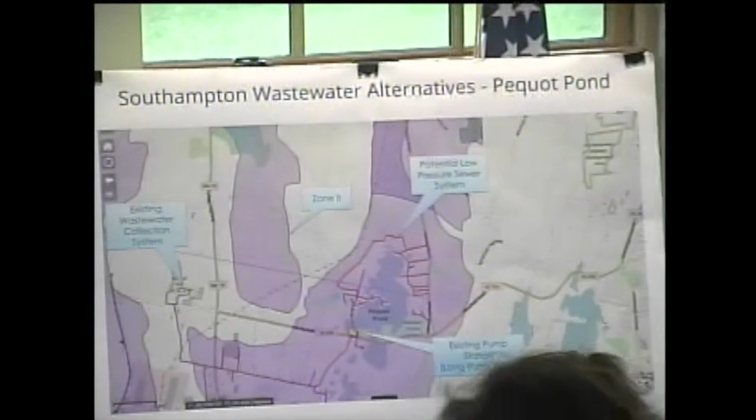As Mary said, my name is Kurt Mailman, and I am a dirty water guy. I've been in wastewater for the last 30 years, believe it or not. And so I've got a lot of experience working with small communities like yours. If you're familiar with the New England Water Environment Association, I'm the chair of the Small Communities Committee, and our role as a committee is to help small communities that have less than 1 million gallons a day of wastewater flow. So we do a lot with small communities, a lot with small flows.

And what we thought we could do today is talk a little bit about your situation here in Southampton and maybe give you some ideas and things to follow up on and carry on the discussion and the dialogue and further it to help you with your wastewater needs. Okay, so bringing you back probably almost 2 years now, we came with a similar set of drawings. Charlie over here probably remembers that discussion.

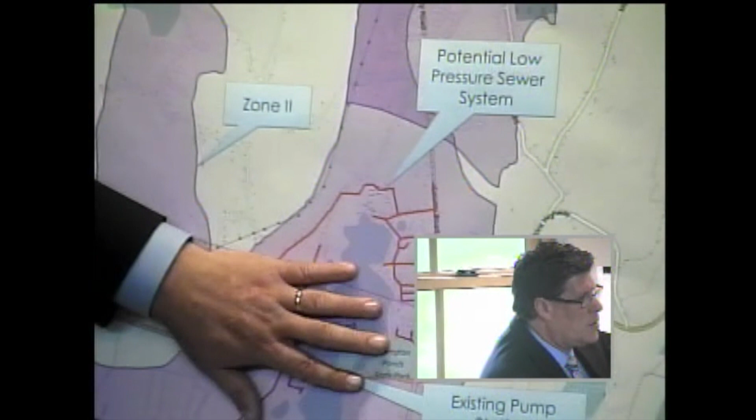And there are really two primary areas of concern, although there might be others that you might identify for wastewater dispersal needs. And so this drawing shows you the Pequot Pond area, which is half sewered into Westfield. I'm sure you've seen similar before. The purple areas here are Zone 2 aquifer protection areas, and the red is the existing infrastructure, including a pump station on Long Pond Road. And that pump station was actually sized to accommodate flow from Southampton when it was designed. So there's a piece of infrastructure that's already in place along the Pequot Pond.

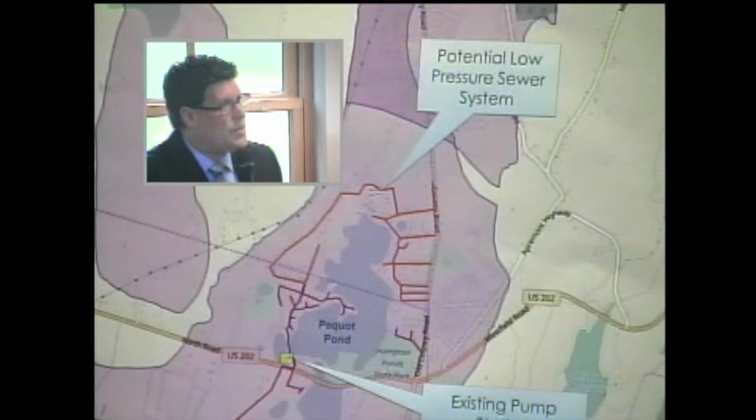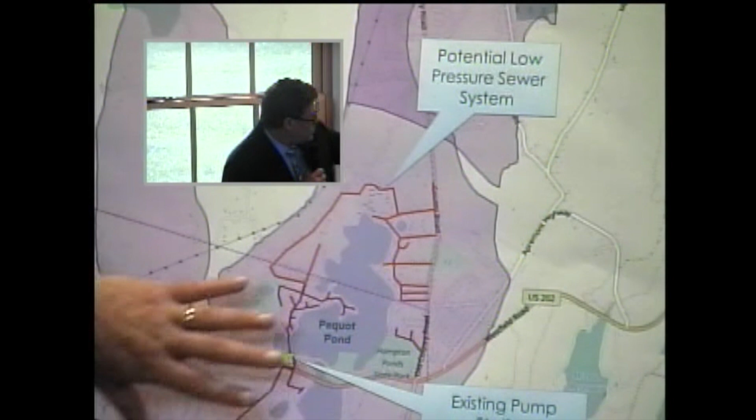So what are the things of concern associated with that area? Well, it's very densely populated. There are about, I want to say, 400 properties there. And the soils actually are pretty decent. They're well-draining soils. Unfortunately, they're draining nutrients into the Pequot Pond. So there are issues with water quality as a result. And so that's the primary reason why the lower section of Pequot Pond was sewered in Westfield many years ago. So people may not notice that there's a wastewater issue because the effluent is actually traveling quickly through the soils, so it's very rapid.

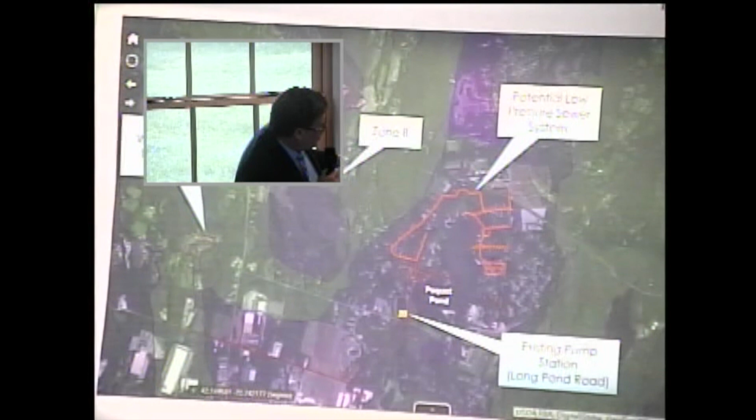This second drawing here just shows, again, to orient you, here's where the pump station exists, and there's a little bit of collection system over here as well.

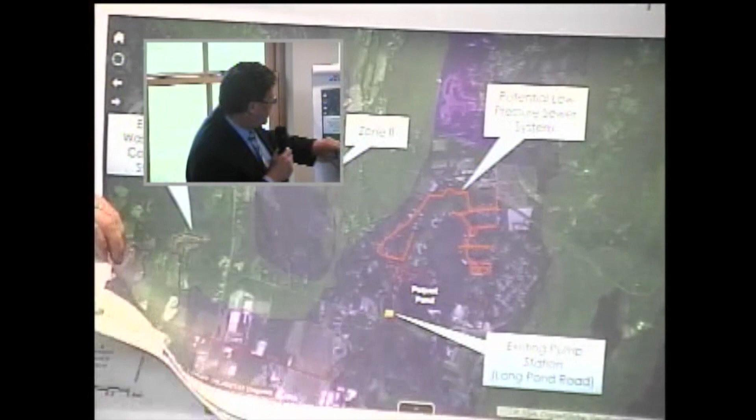How many of those 400 or so homes are actually hooked up to the Westfield sewer system there? There are 400 in Southampton. Oh, so 400 are all on sewer, okay. Oh, those aren't on sewer, those are the ones that should be. Correct. Right, there aren't any on the northern side.

Before I go on, now I'm confused. Are there Southampton homes hooked up to the Westfield? No. None. Okay. All the infrastructure ends at the line. I should have showed you where the line was. So 400 homes in Southampton that are not connected, that are presumably polluting, really?

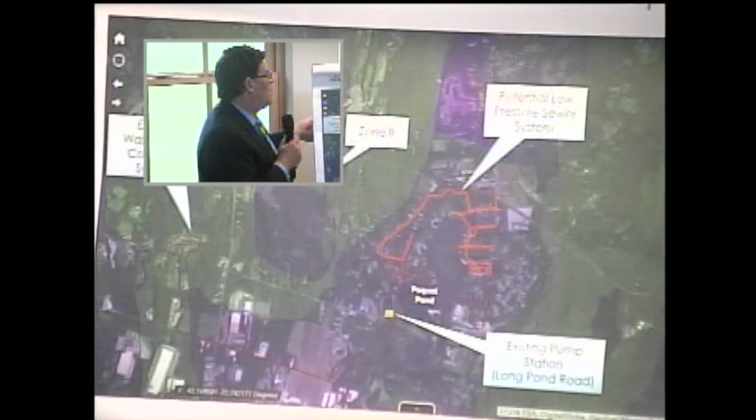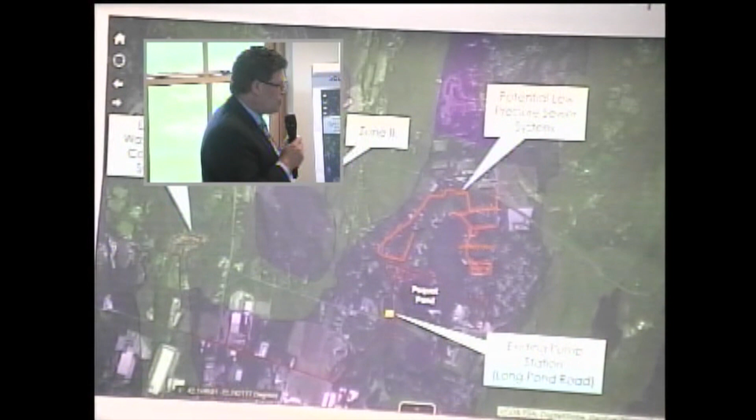There have been studies that have indicated that there's nutrient issues there, going back to, I believe, 1987. So that's not a new issue, but historically there hasn't been action to work with that.

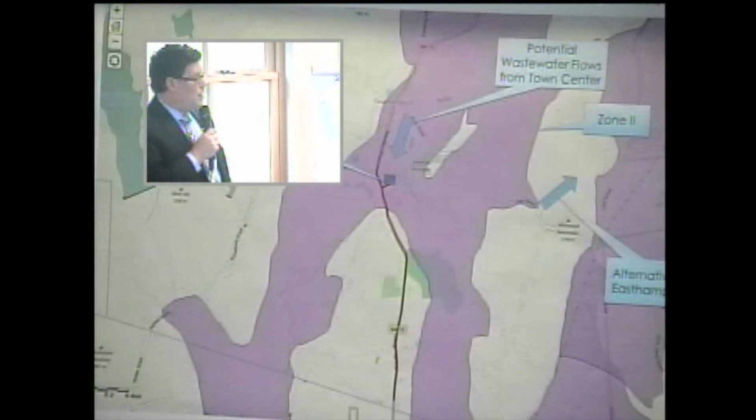So that existing pumping station is servicing Westfield? Yes. But previous studies showed that there was 50,000 gallons a day capacity built into that pump station to handle Southampton's flow if and when they ever wanted to tie in.

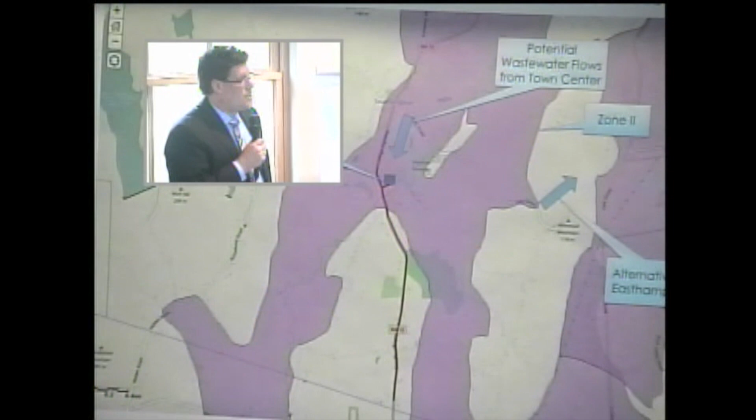Sorry, go ahead. Just for that area, though? Yes, that's right, just for the Pequot area. And that capacity is still there as far as you know? Yes. Okay. And what does that represent in terms of homes? That would theoretically handle the northern section of Pequot Pond.

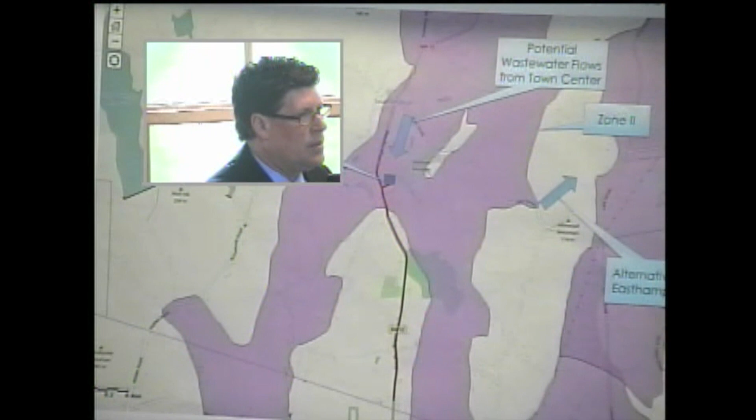Okay. I just wanna- Well, let them do the presentation, yeah.

So the other area that we spoke about a couple of years ago was the Route 10 corridor. So here's your line between Southampton and Westfield. And this area is currently not served by any public sewers. As I showed you before, there are some sewers in Westfield just over the line.

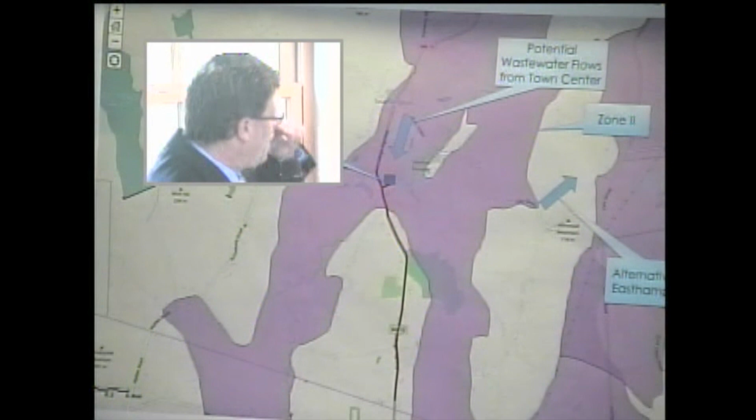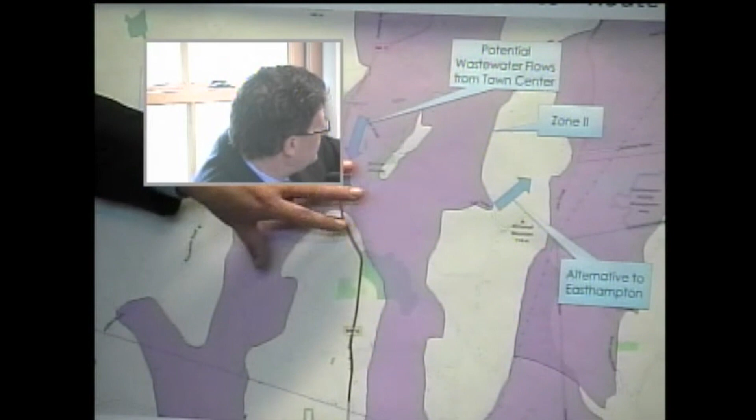There were some studies done previously that recommended sewering the entire town of Southampton by various means, some connections to Westfield by public sewer and some more decentralized community type sewers and systems. One of the recommended areas was a groundwater discharge just to the west of the Manhan Meadow. In a couple of minutes I'll talk about some newer technologies that make that more attractive and maybe more cost effective than previous recommended plans.

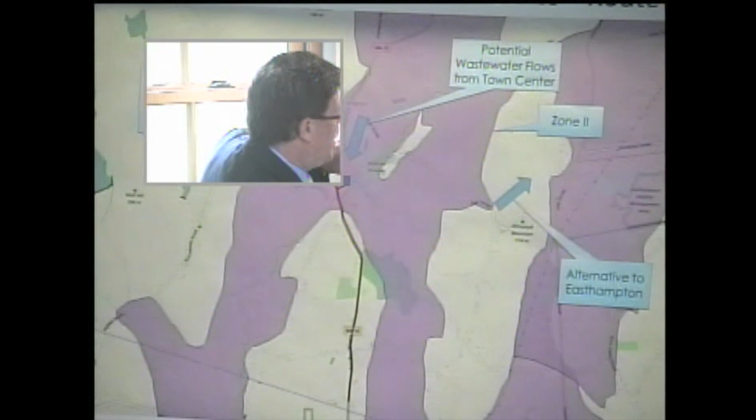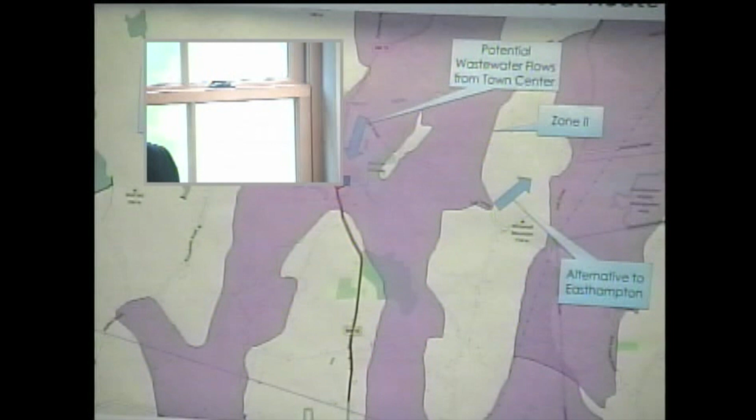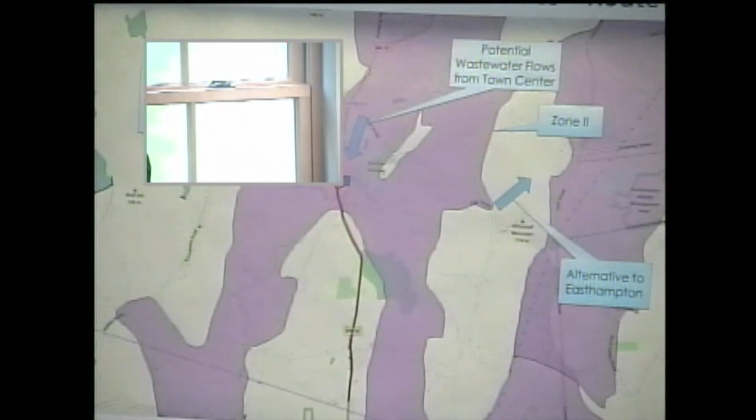There's also an opportunity potentially to route some of the areas with septic issues and decentralized wastewater issues to Easthampton. Back and forth through the years, there have been discussions to connect to Easthampton or not, depending on their capacity. So those are things you can also consider. Westfield presumably has enough capacity to handle wastewater at their treatment plant. Easthampton reportedly also has some capacity available.

I've worked with a number of communities to formulate intermunicipal agreements to make those a reality. It's important to craft those in such a way that it protects the community. I've got a lot of experience doing that.

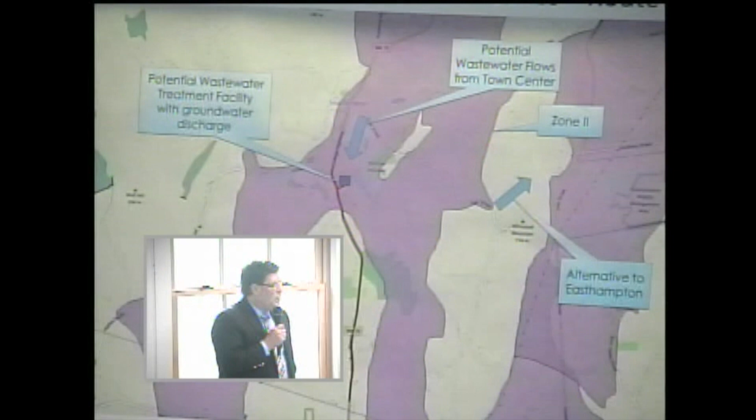So this Route 10 corridor here, the idea was generally to foster economic growth along that corridor rather than to abate pollution problems. You've got wide open spaces along this corridor, so in theory you should be able to find that 4 feet of separation to groundwater because you've got large parcels and you can pick and choose. So the focus from the Pequot area is more water quality. This is more of an economic development focus.

You could also process flows from the northern section of Route 10, either to Easthampton or to what we call a community system. This is just showing the directional arrows of where the wastewater theoretically would come from.

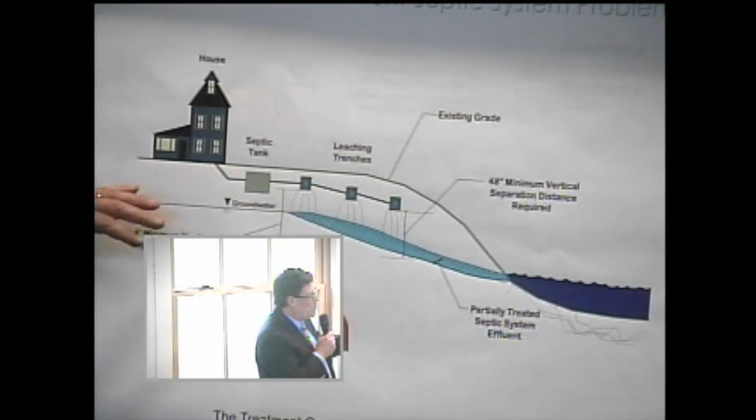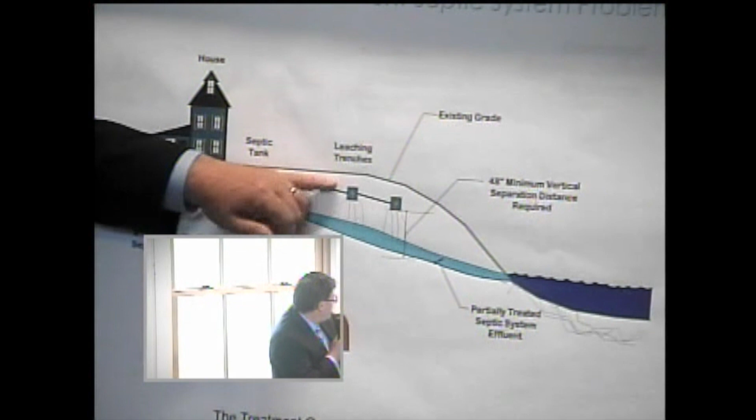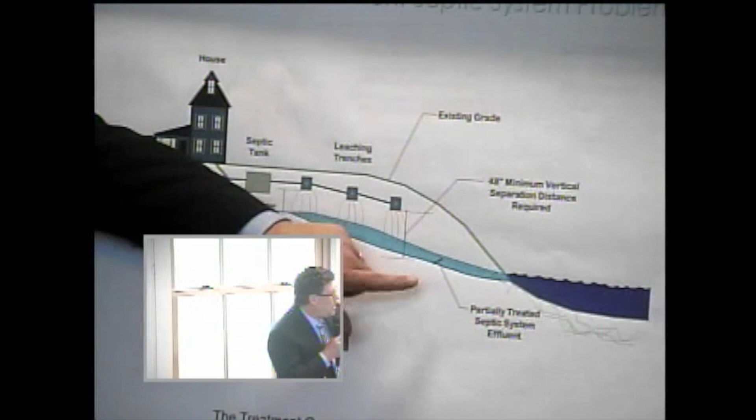This is a quick graphic that shows why there's a potential pollution problem by surface water areas like the Pequot Brook. You have to get that separation to groundwater, and in a lot of instances you can't have that unless you mound systems, but they're very expensive on a parcel by parcel basis. So there's a possibility that you hit the groundwater because the soils are so permeable, and the pollutants travel quickly out into the surface water bodies.

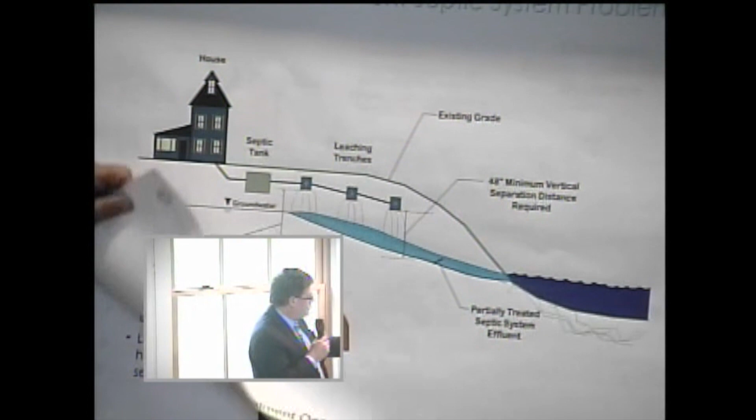So I've talked a little bit about concerns and issues and locations. I'm going to talk now a little bit about technologies to assist. And there are some newer technologies that are available that probably weren't when the original sewers were constructed in Westfield. And one of them is low pressure sewers.

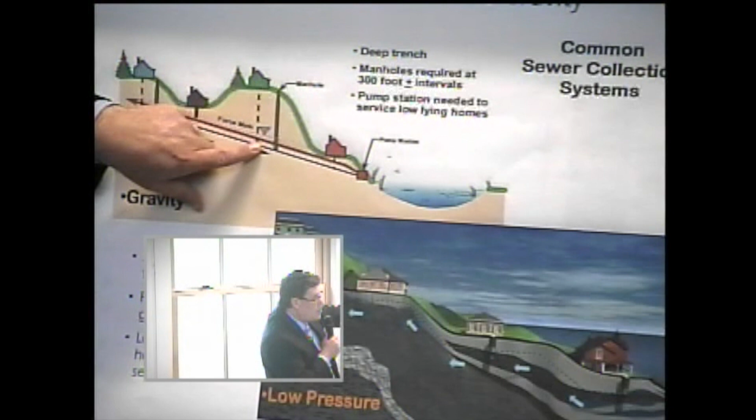And I'm not sure if anybody here is familiar with them, but essentially the old way of doing a sewer system, particularly with a lot of topographical change, would be to collect your pipes in your gravity sewer and have a series of pump stations to pump up over the hills. Okay, but what that does is it requires depth when you get to high points in the area. You have a deep excavation, which is very costly, particularly if you're in groundwater.

So the newer style is really to implement individual miniature, what they call grinder pumps on each property. And what that allows you to do is only dig 4.5 feet instead of dig as deep as you need to get connected by gravity. So there's a cost savings. On the other side of the ledger, each individual house has a small grinder pump sited to process their flows.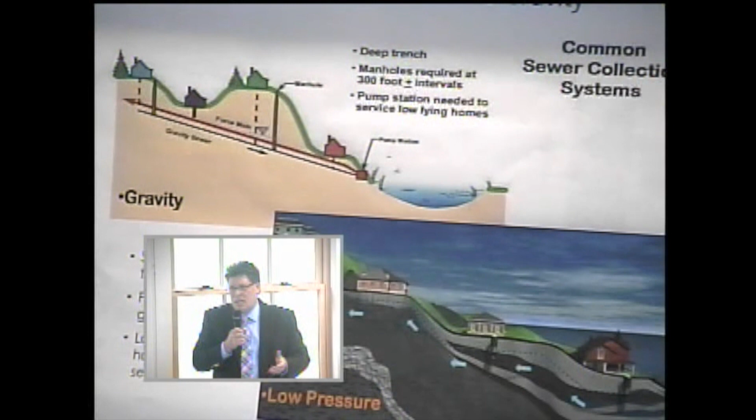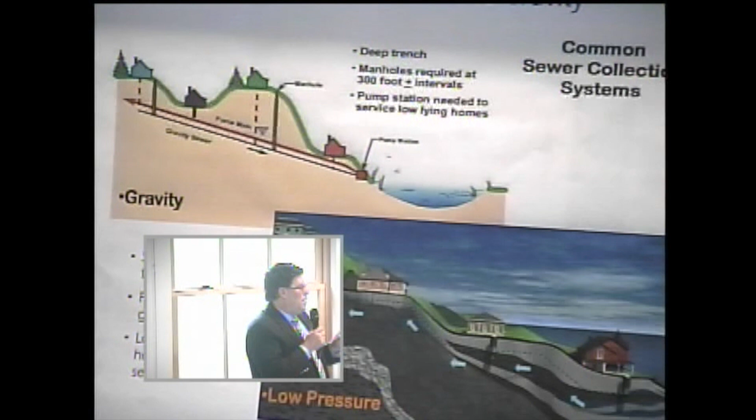So, people would ask questions about, well, what about power supply and redundancy, things like that. So these grinder pump systems are built with connectors so that you could put a portable generator out. You can essentially make them almost idiot-proof. So it's almost like a sump pump that grinds, then pushes it up?

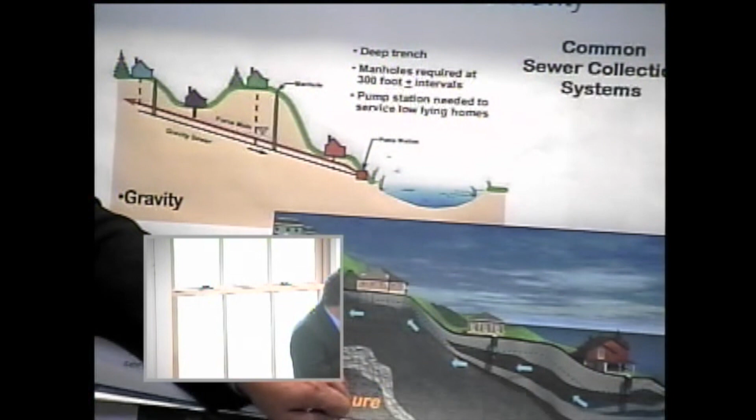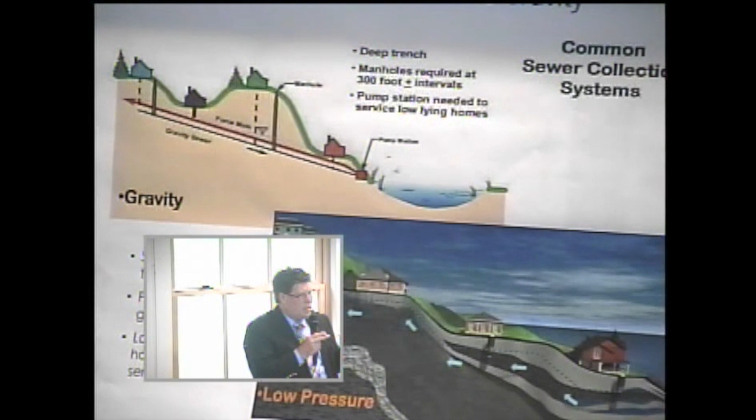Yes. Okay. Yes. And the systems are sized with telescoping sized pipes based on the number of pumps that are in the line. So the first 3 pumps would have a small size, and then the sizes would get larger as you went through the system. But the real benefit is if you're on bedrock, it reduces that, and it also helps you with water control during construction.

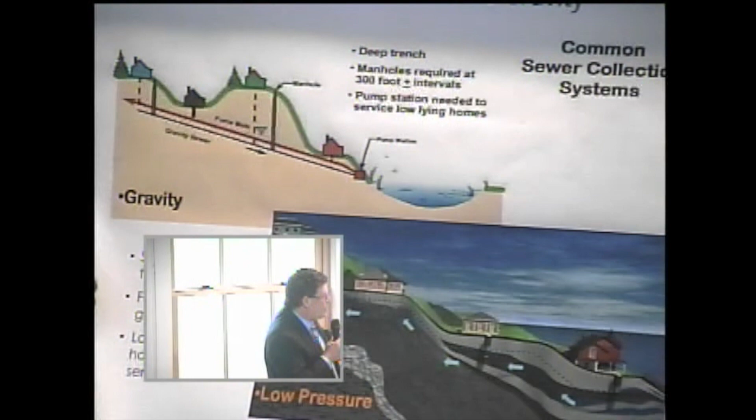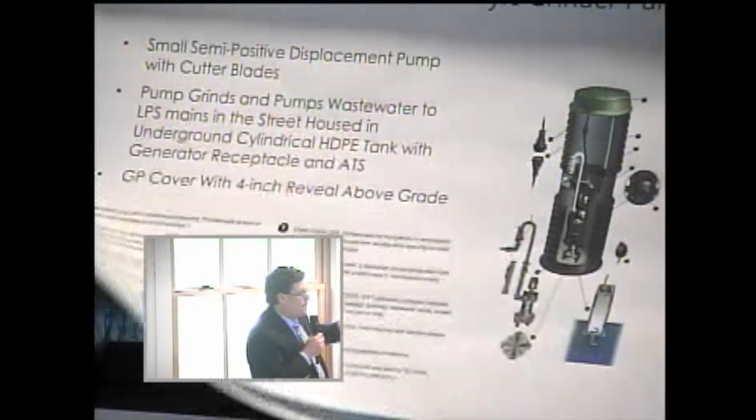Here's a cutaway of what that pump would look like. Okay, it's got a rotor and a stator and a grinder mechanism, and they're very reliable. Not only that, they don't use much electricity. It's like the equivalent of like a 40-watt light bulb. So when you flush a toilet or whatever, does that automatically put the pump on? Or is there a reservoir that it collects for a while, then it pumps it out?

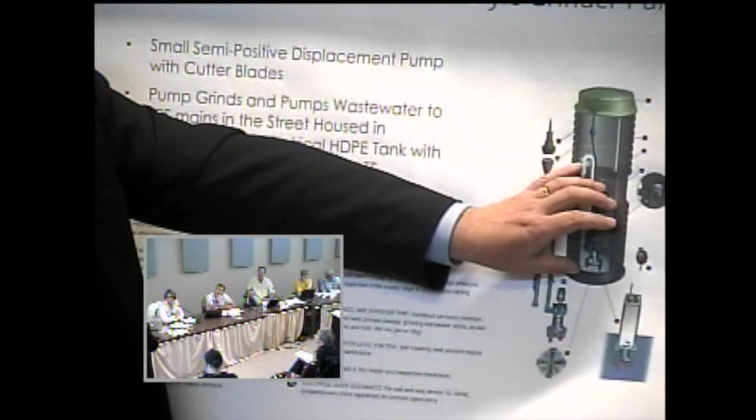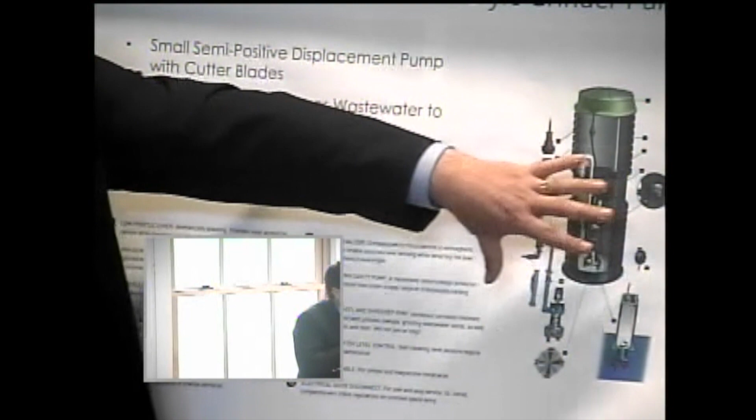Yeah, there's a small holding tank in each one of these. Usually it will range between 20 and 40 gallons. If you had a commercial building, they would sometimes double those up or make a wider base to it with a larger collection area so that you could store more wastewater before it pumps. So it saves energy and wear and tear? Yes. Yep.

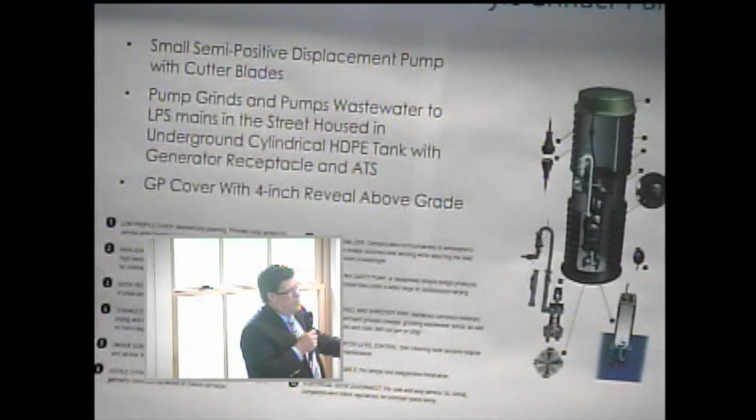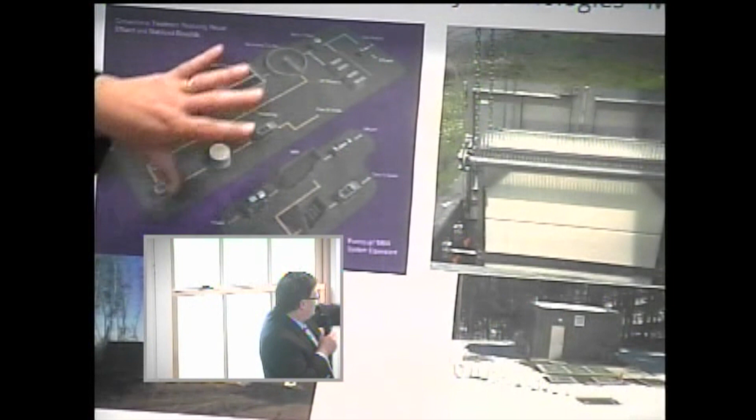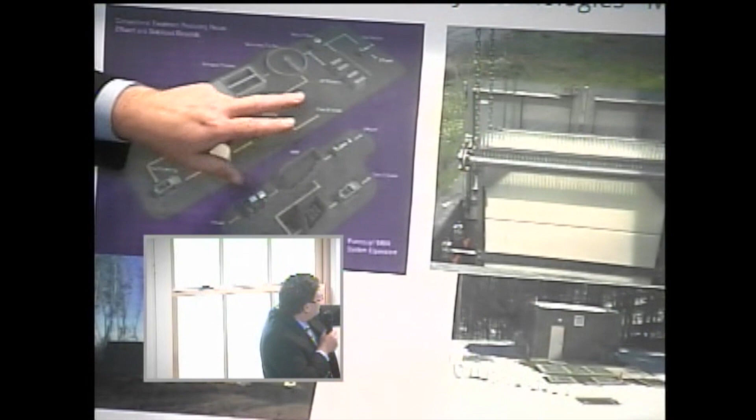So I wanted to talk a little bit about some of the technology available for community systems. Okay, so what I've got here is a thumbnail graphic of what the 1990s, early 2000s small treatment system would entail. So you've got some clarifiers, circular clarifiers, and you've got some aeration tanks, and you've got sludge, and it's a pretty large footprint. And generally the engineering design standards would allow you to have additional footprint to add additional tankage or clarifiers, things like that.

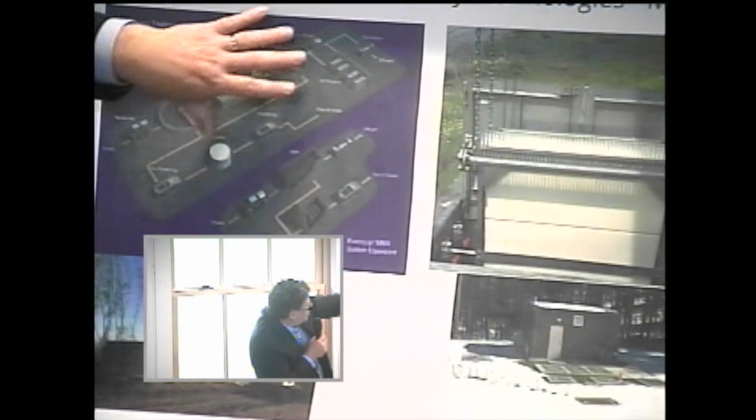So I was just showing this graphic to show you that the new systems, of which the membrane bioreactor, which I show over here on the right, they're much more compact. They actually essentially come on flatbed trucks, and they're modular. So you can stack them one after the other, taking up a smaller footprint and really allowing you to make the capital expenditure in parts or in pieces rather than a huge capital expenditure all at once.

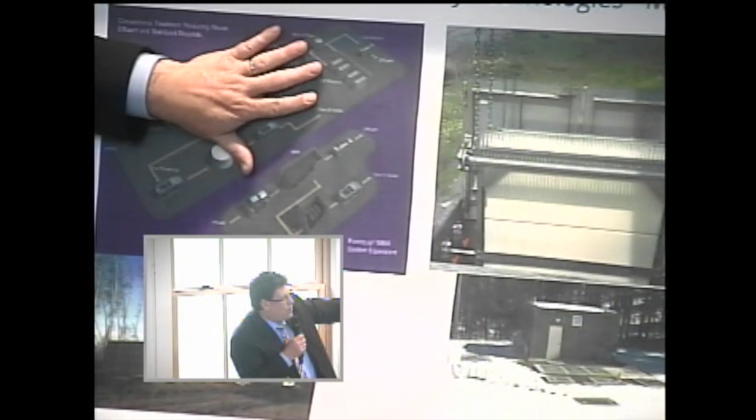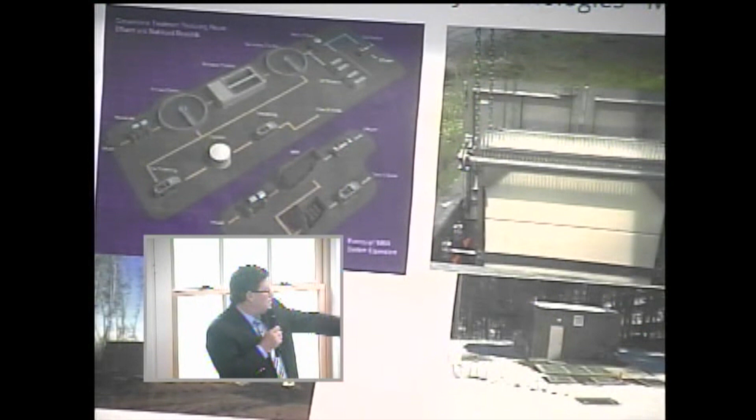Some communities under this style would overbuild their wastewater treatment plants. They wouldn't have enough flow. Then they wouldn't have enough microorganisms to process the wastewater, and it would cause upsets and poor treatability. These modular systems produce a very high quality effluent, almost drinkable effluent that you can disperse. Almost. Almost.

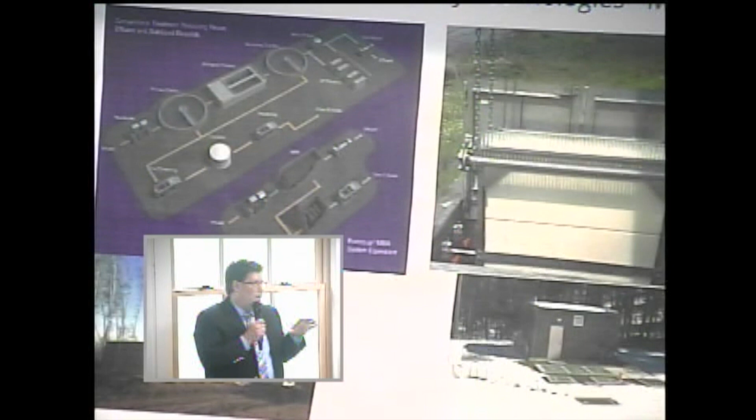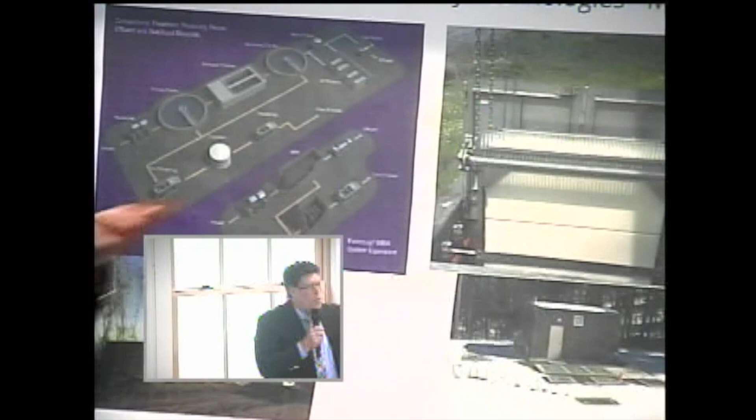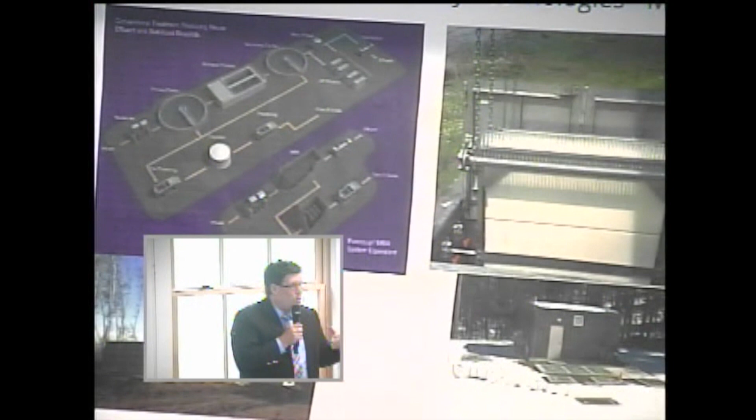The newest thing on the horizon, the real cutting edge view of these, particularly when you have a really high quality effluent, is to implement what they call smart sewers. And smart sewers actually act as a resource recovery tool where you would theoretically, if you had buyers, sell the water for irrigation and sell the sludge that comes out of the tanks annually or quarterly, and actually turn that into a revenue stream for the facility.

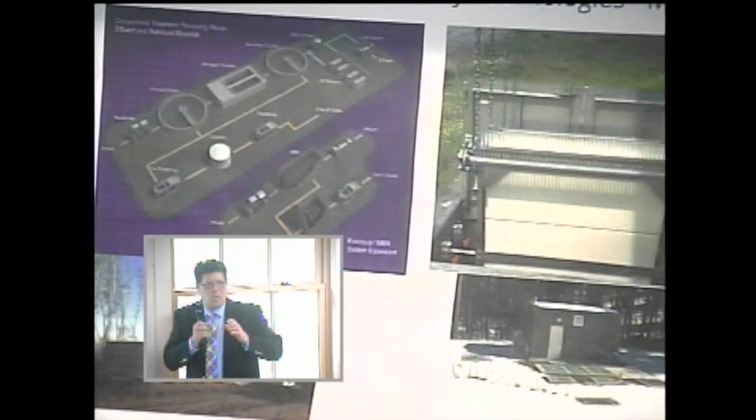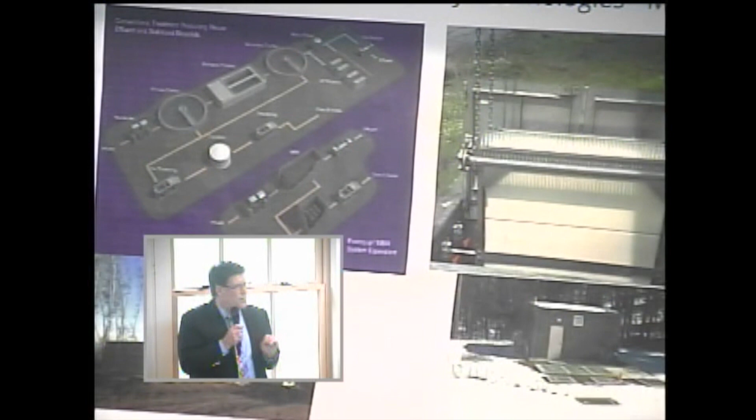So that's where we're heading as an industry, and probably in my lifetime we're going to see it expand. In the Northeast, it's a little less accepted right now because we tend to be a lot more conservative in the Northeast, but it's going to happen.

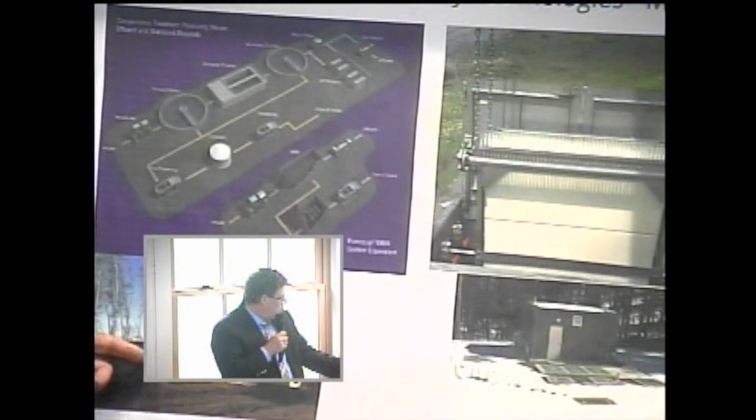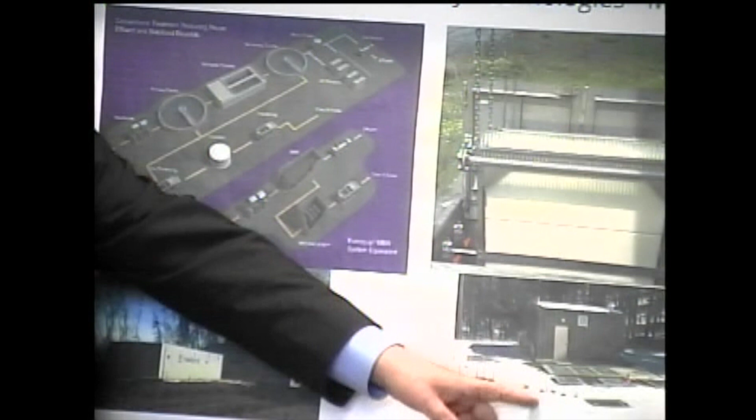So just a couple of pictures down below. You can see this is a treatment system. This is an MBR system. It looks pretty ugly, but it's just dropped off modular flatbed. And this is another system here. This one is in Littleton and processes 40,000 gallons a day. Pretty small footprint. That's the treatment piece. You still have to disperse it. You still need to get it in the ground. So you need some kind of system to disperse your effluent.

Here's another example. This is a different type. This is called an Amphidrome. Again, a lot of this is buried. All you would see is this small control building. You've got an anoxic tank for conversion of the nutrients. And you've got a bioreactor here, clear well reactor, and your pumps out to your dispersal system. So what it does is it intermittently, with blowers, adds oxygen and then takes it away. That's the way you nitrify and denitrify, which removes the nitrogen pollutant.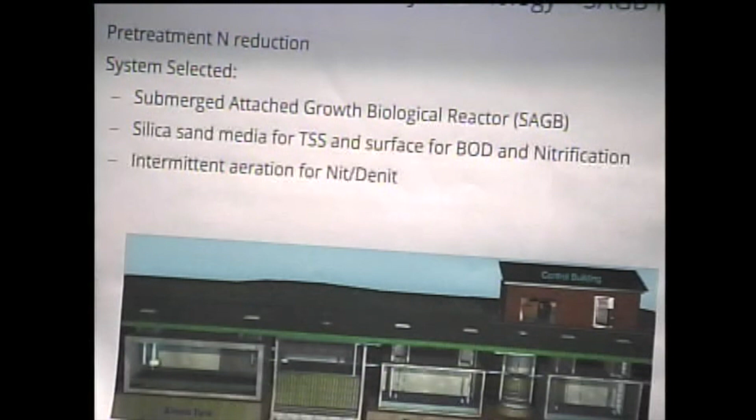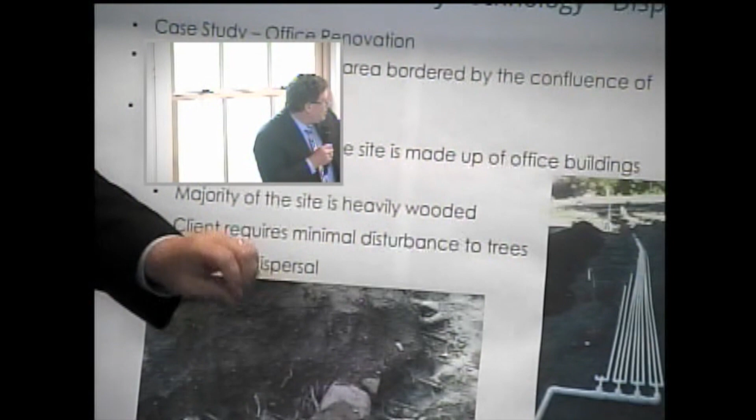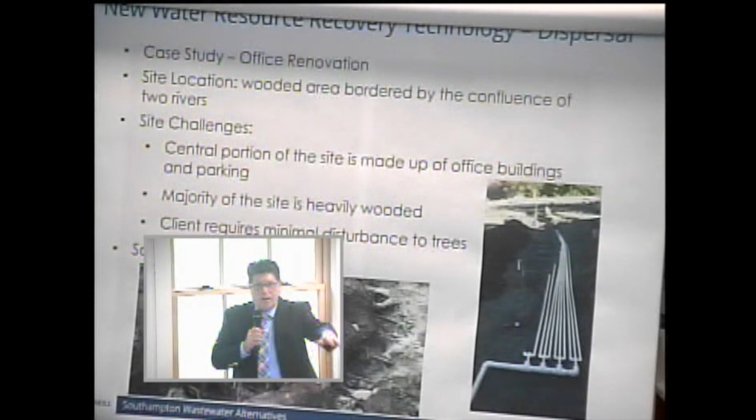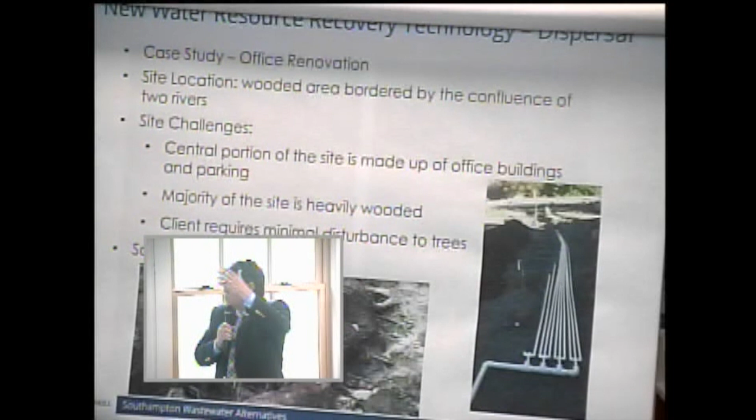So once you've got your clean effluent out of one of these systems, then you need to do the dispersal. And very new in the industry and becoming ever more accepted is drip dispersal. What drip dispersal does is it discharges through small 5/8 inch diameter tubes that have little perforations and emitters. For those of you who are familiar with farming, you actually use a little plow, and you don't have to dig a huge bed the size of this building anymore. You can plow these little tubes in, and each little emitter discharges a known amount of flow every pump cycle.

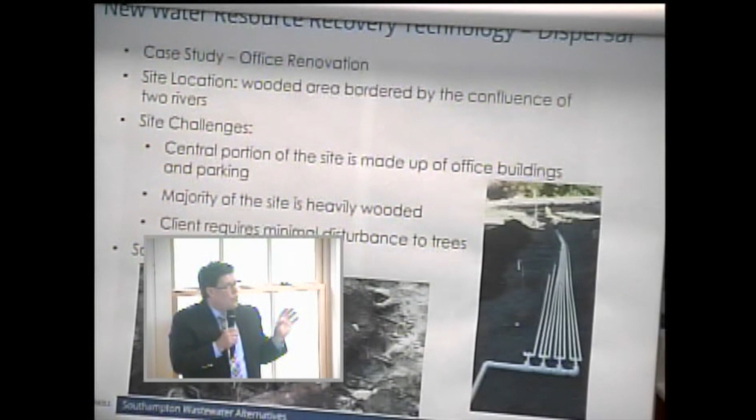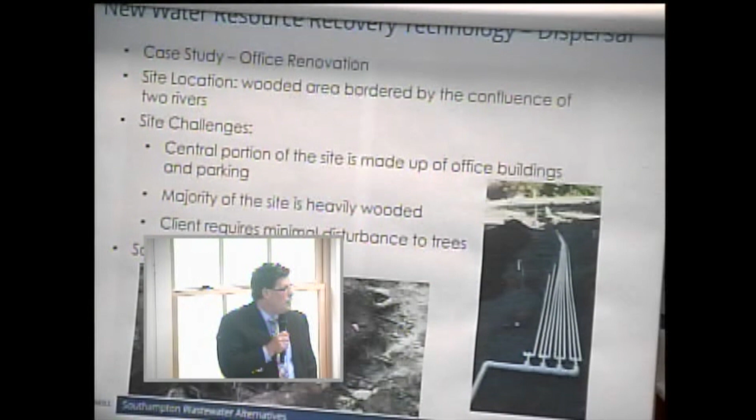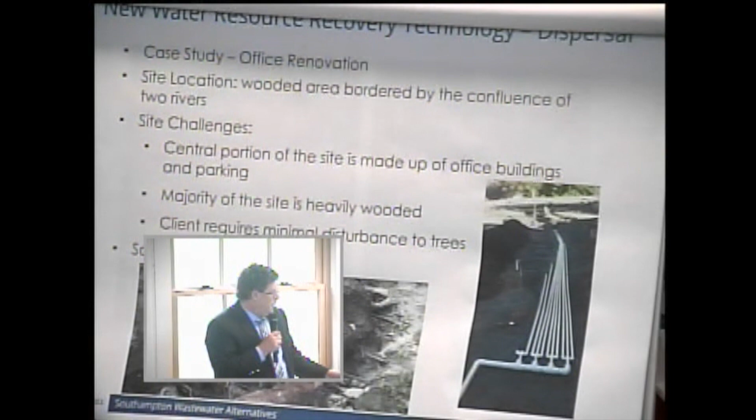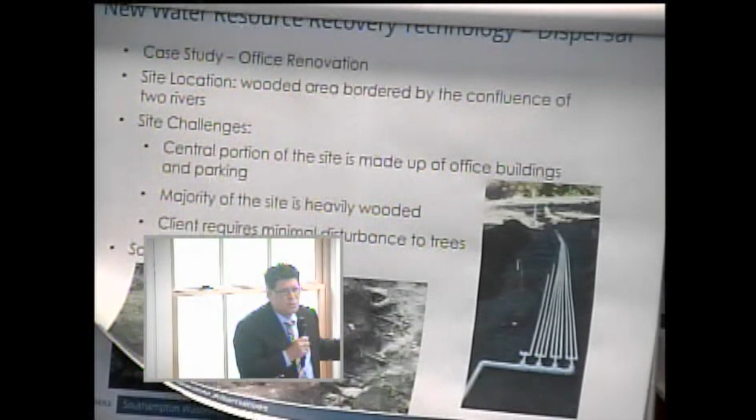So what are the benefits? It's easy to construct, very shallow bury, so if there's places with bedrock and high groundwater, it helps you get that separation because now you're in the upper soil horizon, and it becomes more cost effective to install. So that's something that's fairly new on the horizon. One of the gentlemen from Oakson, one of the manufacturers, was on the Small Communities Committee out of Gloucester, Mass, and he's been one of the champions of that technology. There are really two manufacturers that do that type of drip dispersal, but it's ever more common in the Commonwealth.

I forgot to mention, I'm also a member of NOWRA, which is the National On-Site Wastewater Recycling Association. So we go on field trips and look at who's doing what all around the country in terms of decentralized wastewater.

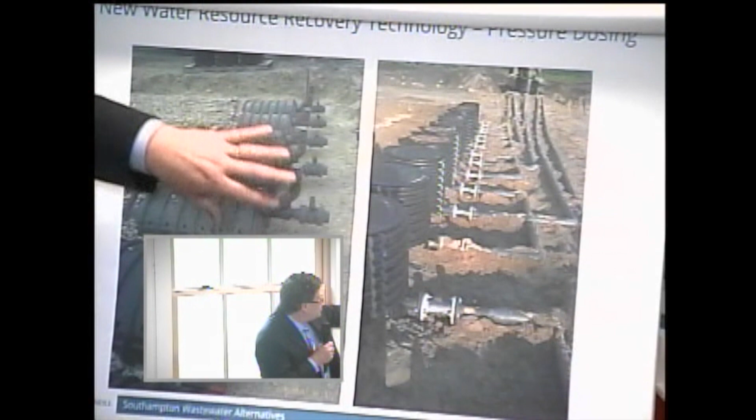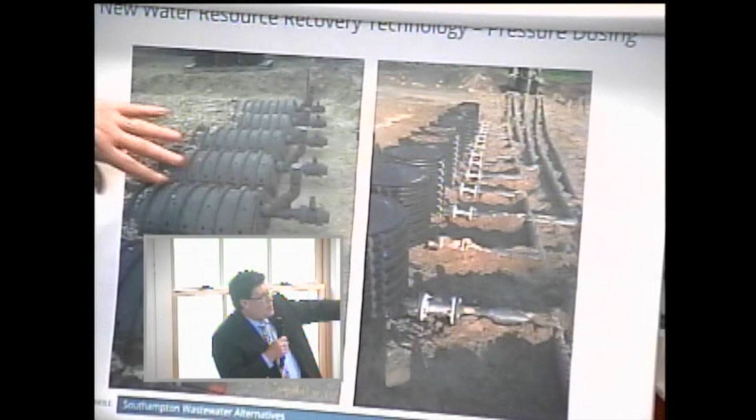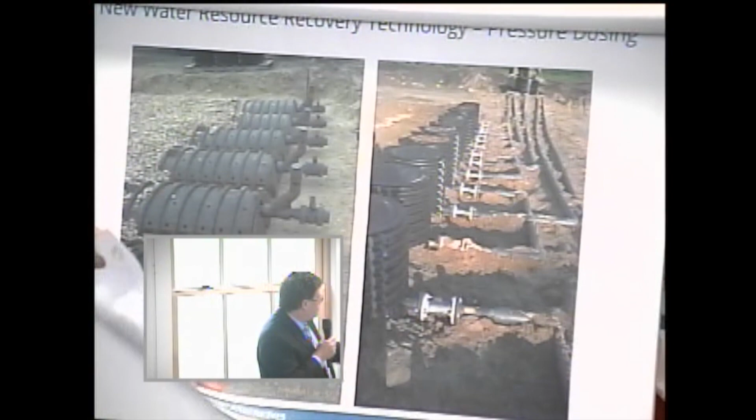Here's a different style. These are called pressure distribution nodes, and these are essentially infiltrator chambers with pressure dosing. Again, this would not be in the same soil horizon as the drip dispersal. It would be a little bit lower, but still pretty high in keeping that 4-foot separation. And these would have pump cycles at a certain interval to evacuate all the wastewater that was generated from your treatment system. And that's pretty much the thumbnail sketch of a few issues and some potential solutions.

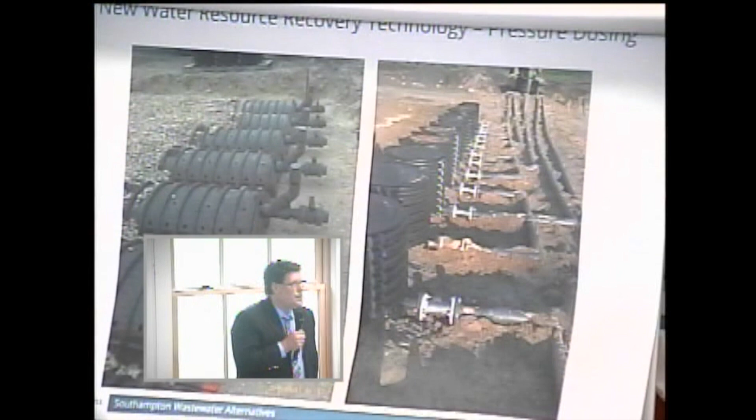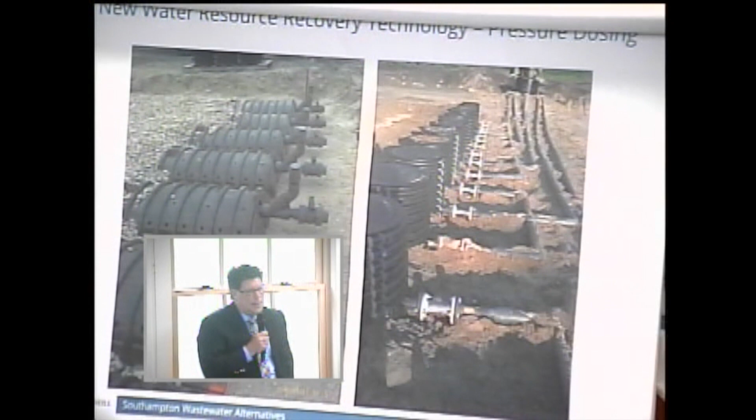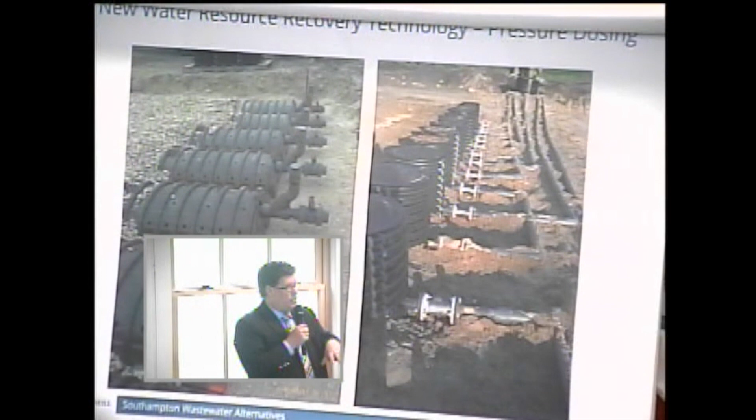So the effluent that's going out the tubes are in here. If you're doing this for years and years, do you have to replace them or move them? That's a good question. Typically, all of these things are sized appropriate for a certain dispersal over a certain area, okay? Certain gallons per day per square foot in technical terms.

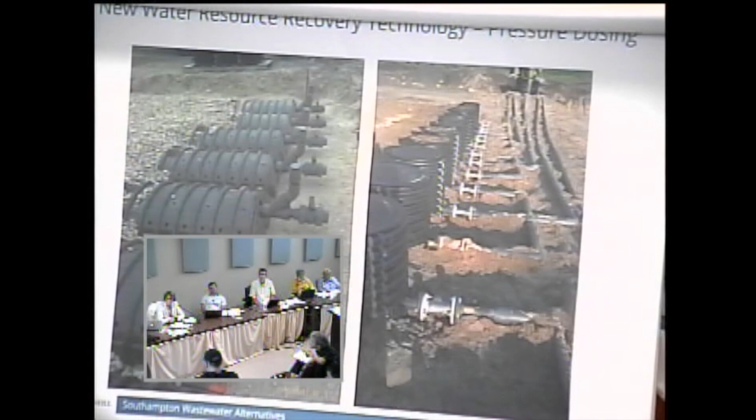The power of having a high quality wastewater treatment system up front, it's almost like putting water into the ground. Because there's not a lot of bacteriological growth, it's not like a septic field at that point because it's almost clean water. So there's not a lot of biomass or biomat that forms in these systems. So if they're sized with the right gradation, you do have to do some soils analysis to make sure you've got proper permeability of the soil. But once they're established, if they have a packaged system up front, they will last a very, very long time.

So it sounds like Hampden Ponds, there's some potential from Westfield. There's maybe some tie-in from Easthampton and Westfield. I know this was all looked at before, and I'm sure, Charlie, you're going to have some information. Or we can build mini plants ourselves. Right. Community plants. So you're here presenting this.

I guess the obvious question is, what can you do? What do you recommend? Because we're pretty new at this, and I think we all would agree that if we can get some sewer system in here, even if it's partial, it'd be a big step in where we're going. Well, what we like to do is integrate in with the overall townwide planning, and generally the comprehensive wastewater management plan does that as part of its protocol, as part of the deliverable.

Massachusetts is very stringent on their programs and what they accept and what they don't. So usually it's a stepped process where the boards and commissions and the wastewater folks come together and formulate what the town-wide needs are through that comprehensive wastewater management plan. I think the last one that was done was maybe 97-ish, so it might be a good time to take another look at that. 22 years ago. Okay.